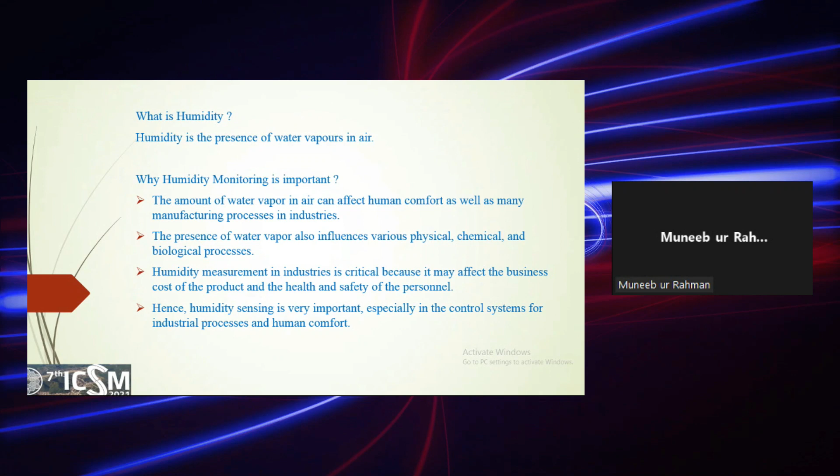and it also affects the business cost of the product and the health and safety of the personnel. Hence, humidity sensing is very important in this regard on the industrial side and in human comfort.

Why humidity sensor? Because we are usually using humidity sensors to monitor humidity in automobile industry, food processing, and semiconductor industries, because humidity, as I told, or vapors affect the semiconductor industries very badly.

So there is a need to control the humidity in the environment, and that is why humidity sensors have very broad application, including industrial, agriculture, environmental monitoring, personal safety, national security, and automotive and aerospace industries.

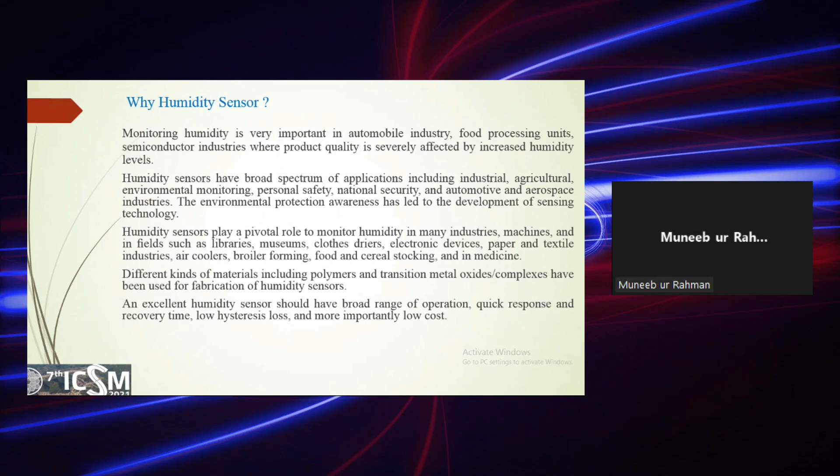So there are many other areas in which humidity sensors are applicable. For example, in libraries, museums, cloth dryers, electronic devices, paper and textile industries, air coolers, broiler farming, food and cereal stocking, and in medicine.

So these are the application areas of the humidity sensor: the semiconducting industries, the medical industries, the agriculture based industries, and domestic applications. So in all these areas, these humidity sensors are very efficiently used to monitor the humidity in the environment.

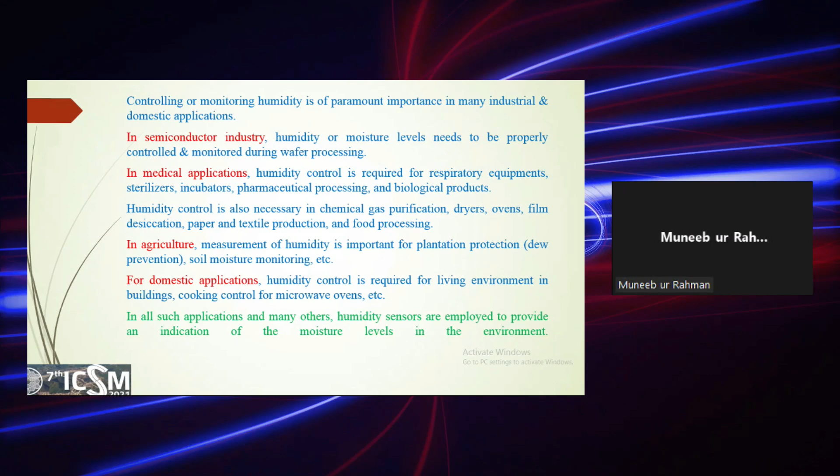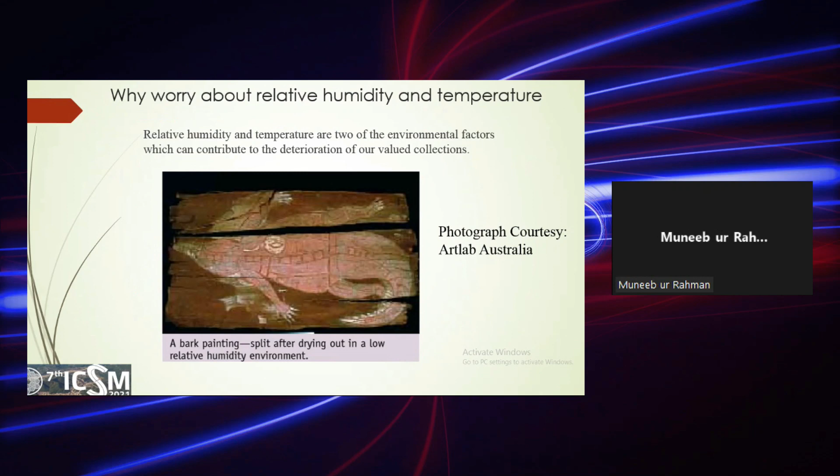So this is what we are talking about: this photograph is taken from Artlab Australia, a bark painting which split after drying out in a low relative humidity environment. So for this purpose, we need to have a proper humid environment to preserve such kind of bark paintings.

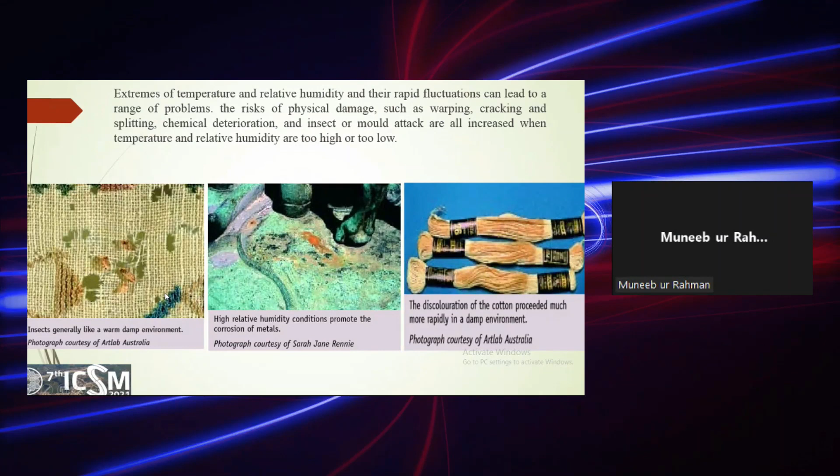So, humidity sensor fabrication. First of all, we prepared the solution of caged nickel sulfide, and then we drop cast it between the two electrodes which are already deposited on the glass substrate, and then we made an electrical connection,

and we measured the capacitive and resistive response of the caged nickel sulfide material when the humidity in the humidity chamber is increased from very low humidity to very high humidity, up to 95% humidity.

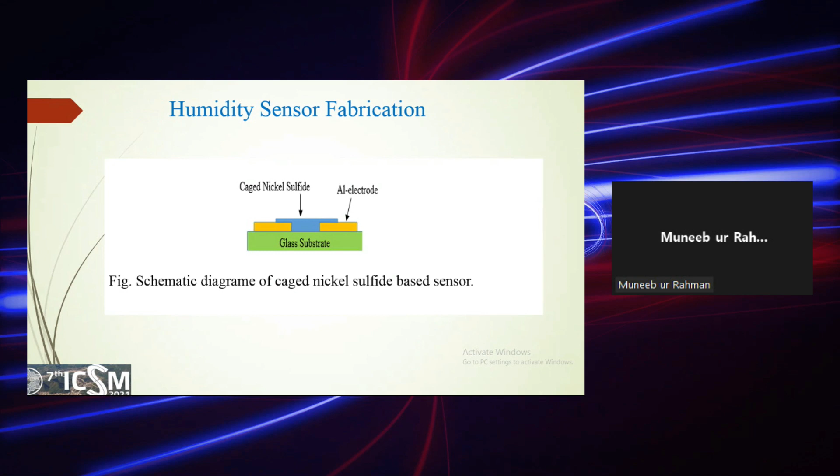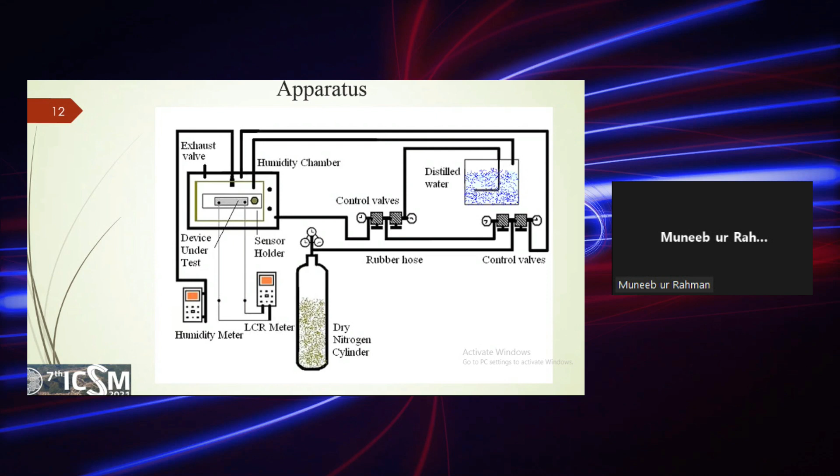and the surface of the sensor, which is based on caged nickel sulfide, absorbs water molecules on the surface, and also the water molecules percolate inside the pores and pore channels, which we saw in the SEM image of our material. So this is basically what happened.

So the first layer, which we call the chemisorbed layer, because this is chemically adsorbed on the surface of the material, this first layer of water molecules is less mobile as compared to the second and subsequent layers above it, because this is chemically bonded with the surface of the material.

So this is less mobile, and we will see that during this surface adsorption of the water molecules, the capacitance of the device is quite low. When we are increasing the water molecules in the chamber where the sensor is placed, the water molecules are

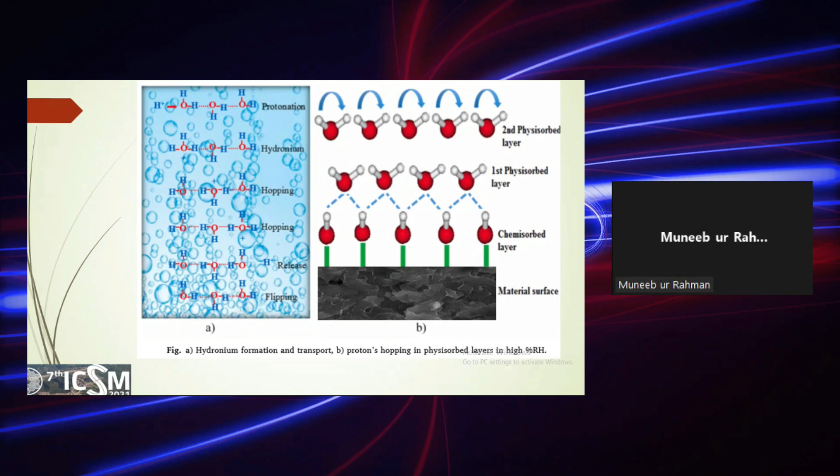This is the resistance and capacitive behavior of our sensor. When the relative humidity in the chamber where the sensor was placed is increased from 30 to 90 percent RH, the capacitance is increased from about 16 picofarad to 42 picofarad. Sorry, 38 picofarad, from 15.9 picofarad to 38 picofarad, when the humidity is increased from 30 to 90% RH.

Similarly, due to the hydrogen transfer, the protonic conduction or H+ ion transfer, the resistance of the sensor material is decreased from 2.94 × 10^8 ohm at 30% RH to 2.3 × 10^6 ohm at 90% RH. So when we increase the humidity from 30% to 90% RH, there is a drop of two orders of magnitude in the resistance of the sensor.

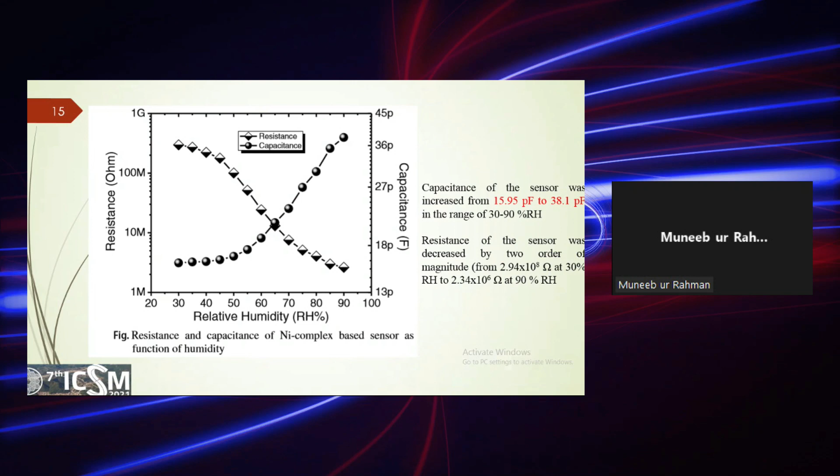This is basically how the chemisorption and physisorption affect the capacitive behavior of the material. So here we show the curve fitting. We have two slopes in our data. The first one is from 30 to about 55% RH. This slope is very low, and the goodness of fit is 0.85, which shows a linear behavior in this chemisorbed layer. Because the chemisorbed layer is less mobile, we have a very low value of capacitance from 30% RH to 55% RH.

When we increase beyond 55% relative humidity up to 90%, we see that there is an abrupt increase in the capacitance of the sensor, for which we have a goodness of fit of 0.99, which again shows a very linear behavior. So there is a large increase in the capacitance when we increase the relative humidity from 55% to 90%.

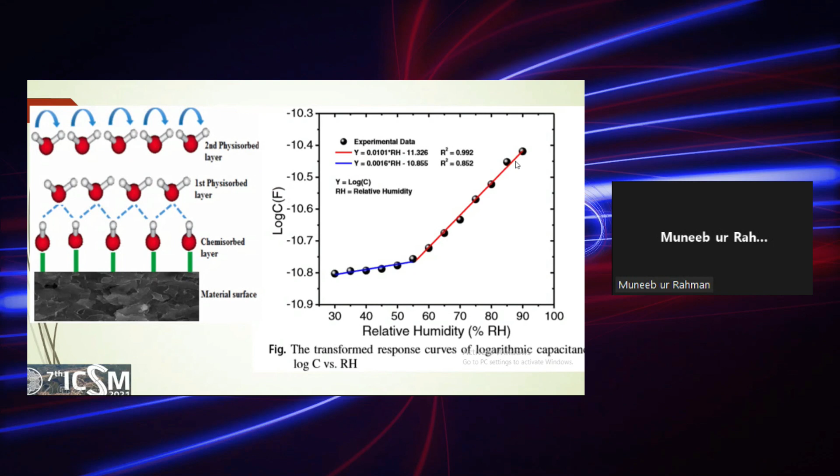The capacitance increases because the water is adsorbed in a physisorbed manner, where the water molecules behave like a bulk liquid. So the conduction mechanism of the H+ ion, which we showed earlier in the Grotthuss mechanism, is very feasible, and it moves very easily from one electrode toward the other electrode. So the capacitance of the device is increased with the increase of humidity.

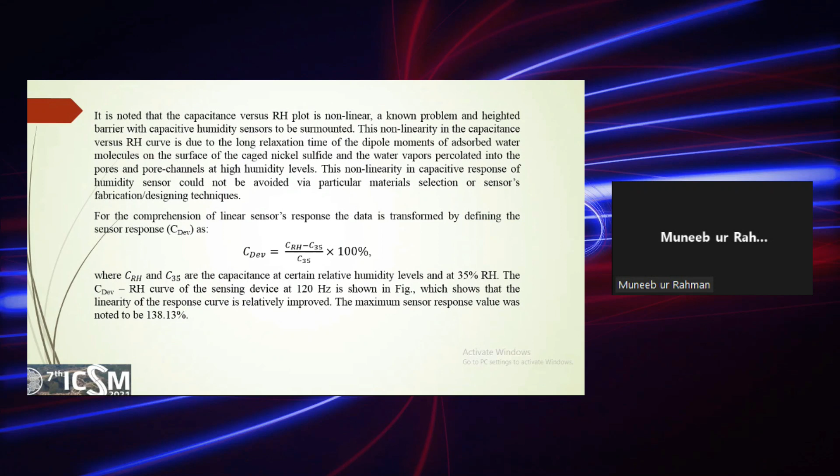There is a problem normally with capacitive type sensors: the behavior of the sensor is not very linear. So for this purpose, we transform our data by defining the sensor response, using this formula as reported in the literature, where C is the capacitance at some elevated relative humidity, and C35 is the capacitance of the sensor at 35% RH. This shows the response of the device, which is very linear up to 60%, and then deviates from linearity above 60% relative humidity.

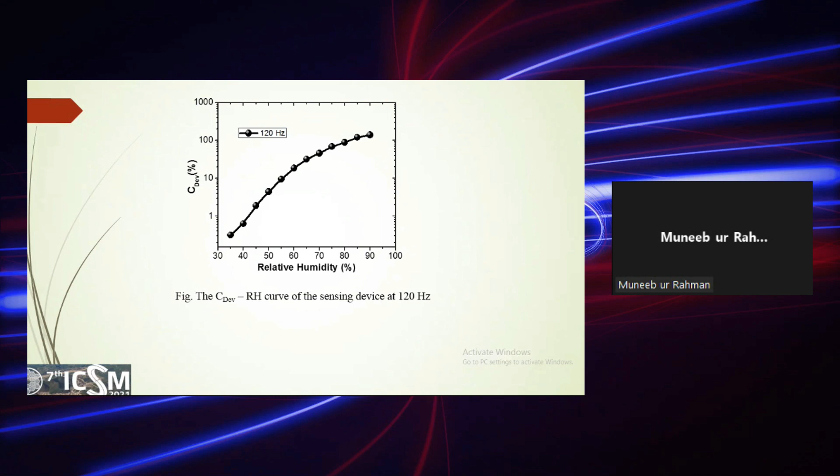When we increase the temperature from 30 to 80 degrees C, we see that the capacitance of the device increases. The red color is for 1 kilohertz, and this black one is for 10 kilohertz. For 10 kilohertz, the capacitance is dropped. If we see at 80 degrees C, the capacitance is dropped from here to here.

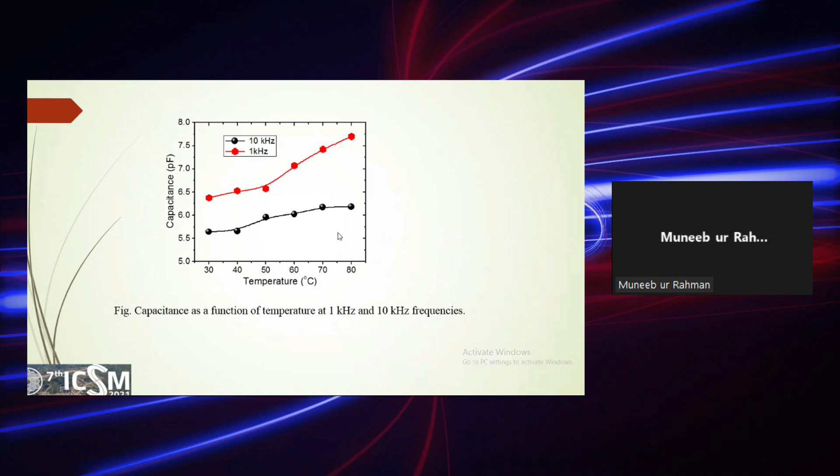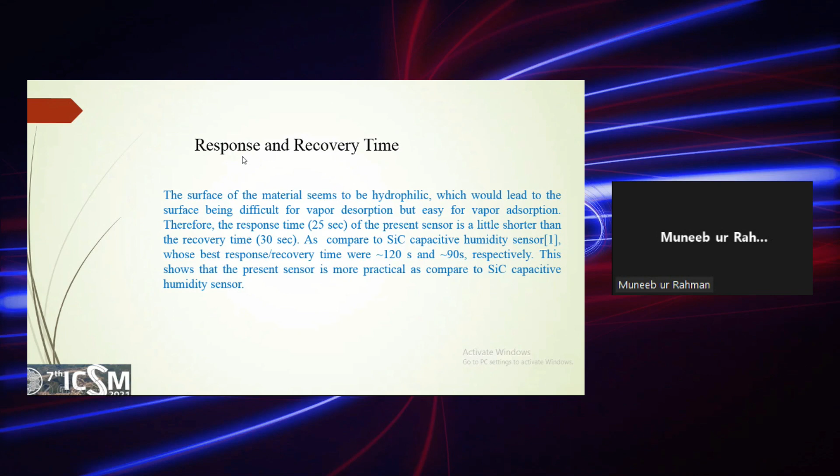Response and recovery time is very crucial, because in certain applications we need quick response and quick recovery time, a very short response time and a very short recovery time, because we need to monitor many things. We need a very short recovery time in order for the sensor to be ready for another data acquisition. The sensor will be more effective if the response and recovery time is very short. The response and recovery time of our sensor: the response time was noted to be 25 seconds, and the recovery time was noted to be 30 seconds.

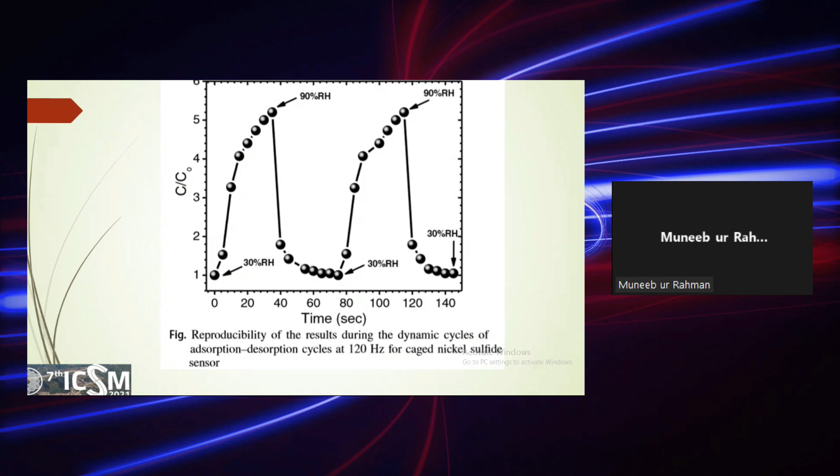We also repeated this measurement for another cycle to check that it is repeatable or not. So this is what we did. Our data shows that it is repeatable. Our sensor repeatedly produces almost the same results, so the repeatability of our sensor is very good.

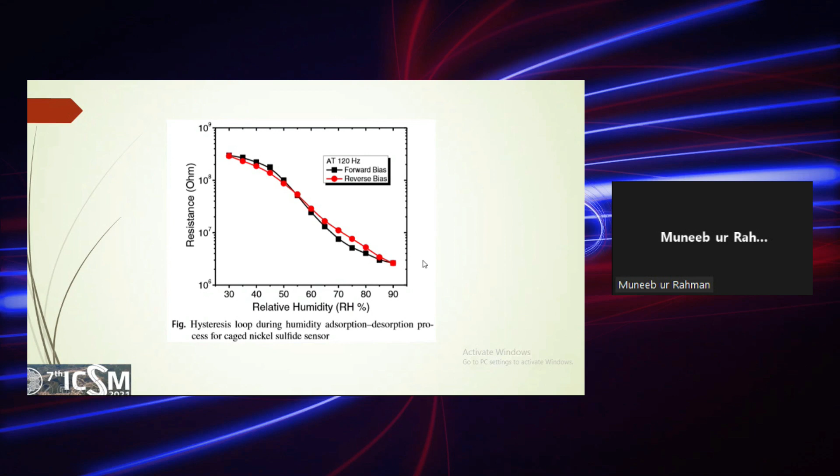This is the hysteresis loop for the sensor. The resistance, when we increase the humidity inside the chamber from 30% RH to 90% RH, the resistance of the device decreased, which shows a semiconducting behavior. This is also observed with the temperature effect, so we noted that it behaves like a semiconducting material. In this case, there is a hydrogen H+ ion contributing, hopping from one molecule to another. As we increase the humidity, a water layer adds up, and that is why the resistance of the device decreases. Then we gradually decrease the humidity in reverse order to check the hysteresis of the device, which we see is very low. For a good sensor, the hysteresis loop should be as narrow as possible.